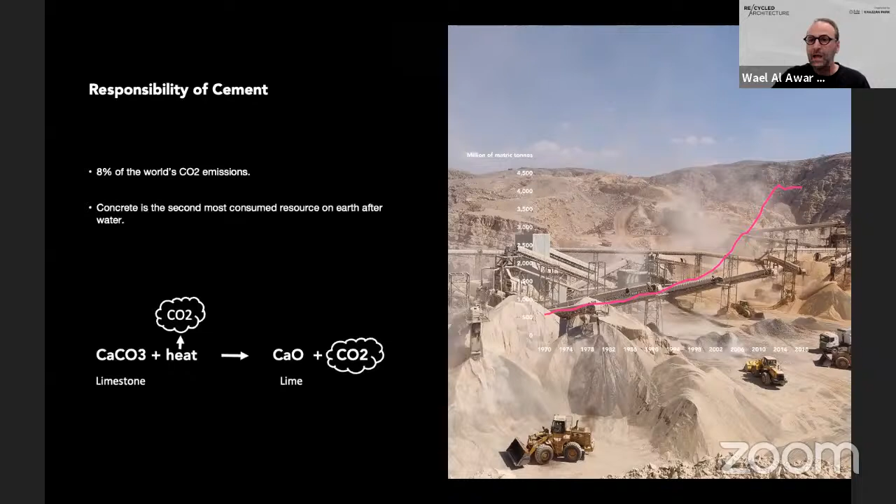So today, cement, why is it unsustainable? It is not because of the energy required to produce cement. It is actually a chemical reaction. You have to transform limestone to lime. And in this transformation, there is loss of CO2. And the incredible thing about this loss of CO2 is that it's a 1-to-1 ratio, meaning that 1 ton of cement produces 1 ton of CO2.

So the ratio is 1-to-1, which means that even 1 ton of cement, which probably can construct you a single column, not much, would need a tree for 40 years to consume that amount of CO2 that's gone into the environment. So if cement was invented today, no one would approve it. It would be a disaster. It would be something that no one could accept to use.

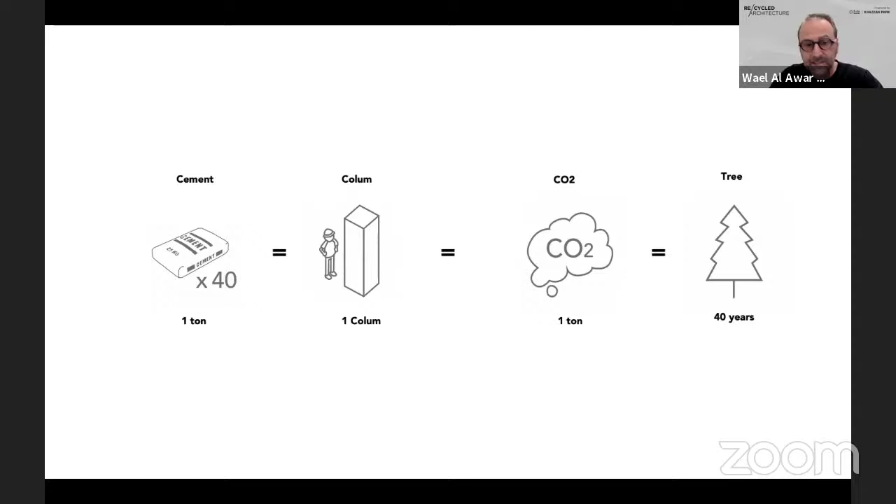But unfortunately, it's a material that's been around for so many years that the industry has become so powerful that we are unable to change it, even though we know of all the catastrophes it is causing in our environment. This is currently under construction in China, the biggest cement structure. So it's not only for architecture.

Cement is used a lot in infrastructure also, as well as things like tile paving and concrete paving in the streets. So cement is not associated only with buildings, but also with so many other structures. And actually, only 1/3 of cement is used in architecture or physical buildings. 2/3 are used in infrastructure and other things like wave breakers that go into the sea and the ocean.

Jumping on, so we talked about pollution. The second thing is extraction. Our construction industry is responsible for 40% of material depletion, resource depletion. So we consume from our planet. We're eating up our land as we go, 40% today. If we wait till 2050, what would that projection be? It's unimaginable at that scale.

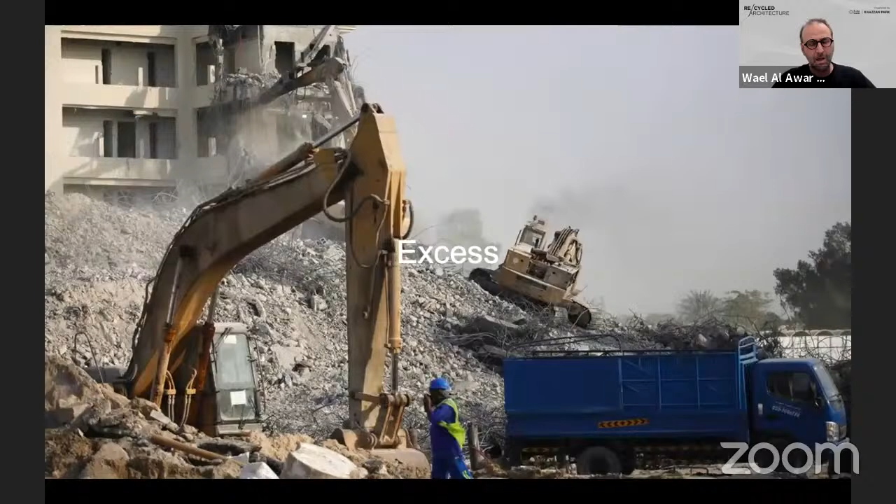And energy: today the construction industry consumes 40% of the global energy, 86% of which is non-renewable energy from fossil fuels. We are not even using solar, wind, or any other power. Mostly, 86% is from fossil fuels. And then finally, waste: we are also responsible for 40% of waste.

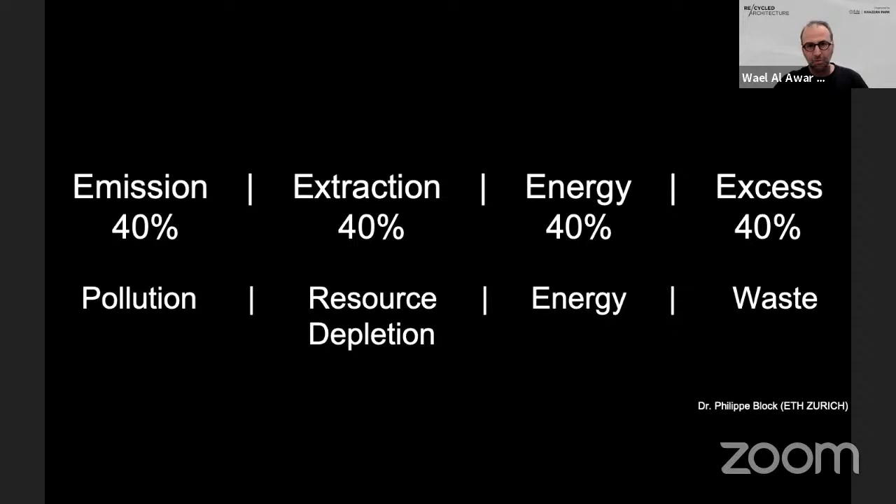These projections have been studied by Dr. Philippe Block at ETH Zurich, and I saw that in one of his last lectures. And these are things that we have to be very aware of, and we have to ask ourselves, what is our responsibility? What is my responsibility as a contemporary architect today in the 21st century, when I see this impact that's happening on the environment?

The vernacular architecture of the UAE was using the coral blocks that you find from nature, stacking them to create an architecture, where architecture was very contextual. This is something that is very inherent in our design philosophy, in my design philosophy too, that context is key, culture is key. Those have to be reflected in architecture also.

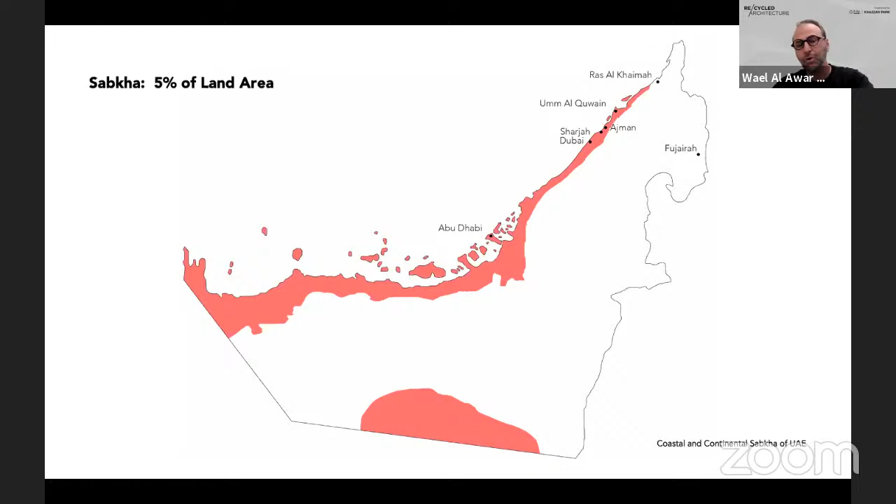It's very important to note that the UAE sabkha in 2018 was listed on the UNESCO tentative World Heritage sites. It is of that importance. It's a natural phenomenon that should be preserved and well understood. And we should understand that sabkhas also sequester CO2. 1 square meter of sabkha sequesters more CO2 than 1 square meter of rainforest.

So these are environments that can help us actually consume and get rid of CO2 in the environment. So they are called carbon sinks or natural sinks. What are other carbon sinks and natural sinks in our environment? The sea. The Arabian Sea is a natural sink or a carbon sink.

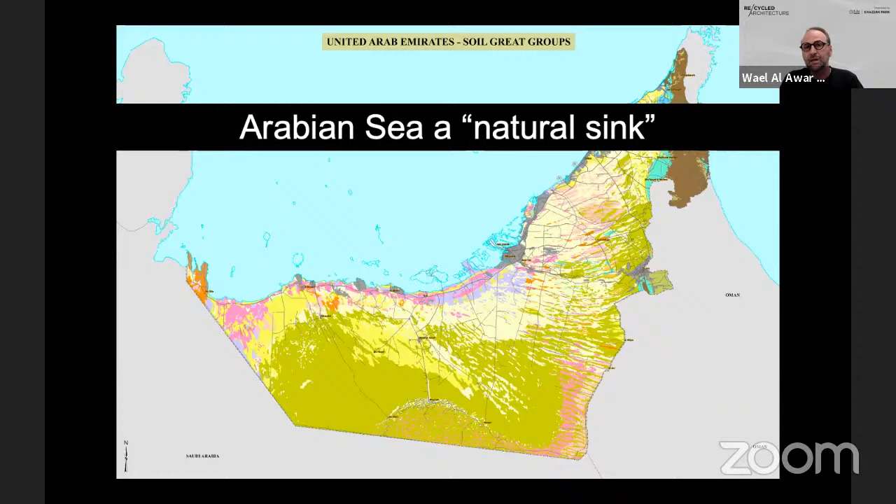But what's happening to that is important also to understand, that unfortunately, the GCC in general, not only the UAE, has scarce water resources. There is no water, so we need to desalinate. There's nothing wrong with desalination. I don't think there is anything wrong with that.

But what I think is wrong is that when you end up with a waste product of desalination, which is a highly salt concentrated brine, what you do with it is you throw it back into the sea. This is being dumped back into the Arabian Gulf. And you have all these countries, UAE, KSA, Kuwait, desalinating extensively. UAE is the third largest desalinator. First is KSA, second USA, third UAE.

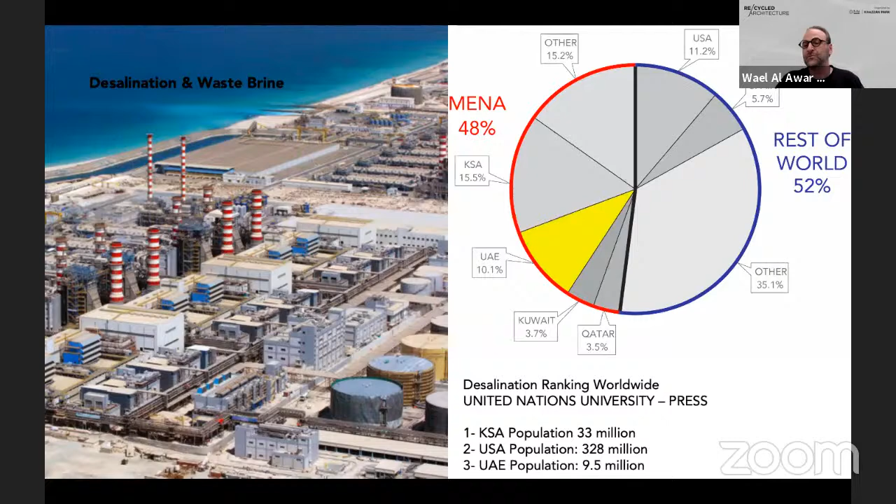And that residual brine is being dumped into the sea. We are threatening the sea. Every day there's the equivalent of 4,800 Olympic swimming pools being dumped back into the sea. So what does that mean? The MENA region is responsible for 48% of desalination, 52% for the whole rest of the world. And yet our population doesn't reach 100 million.

So for us, the important thing is that we saw that this desalination waste is probably an industrial waste that we can look at as a material in order to sustainably create an equivalent or a contender to cement, to Portland cement.

Marina Tabassum came up with fantastic terminology for what we are doing, and she called it the future vernacular, where in the past, the vernacular was your geography, your stone, your bamboo, your mud. Today, vernacular could be your waste. So this is where, again, it ties into sustainability, it ties into recycling. So we are studying how we recycle this residual brine that's being dumped back into the sea. And that's the whole theme, the whole research for the UAE National Pavilion in the Venice Biennale.

So we began with extensive experimentation, which starts off with simply placing fabrics into highly salt concentrated solutions, which start to crystallize, and then a fabric that works in tension starts to work in compression, and hence automatically creates an architecture.

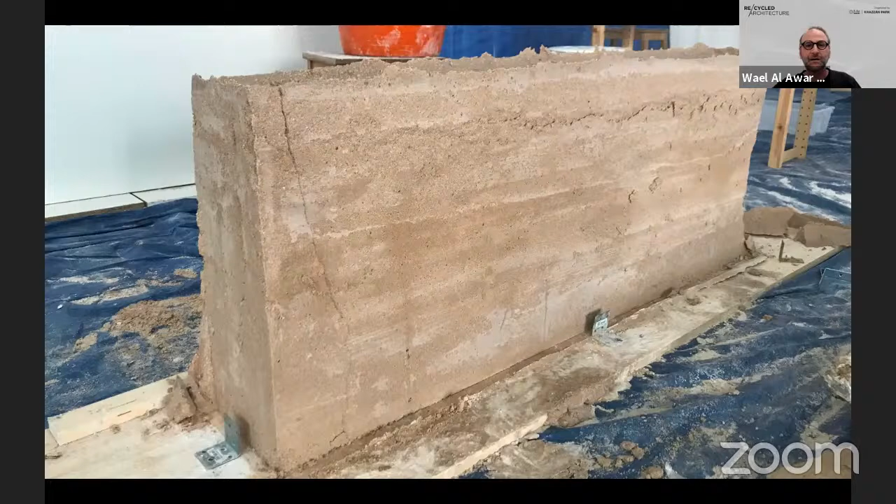These are more images of the different experiments with the different materials and minerals that we have extracted from the desalination brine, and also that are found in the natural geography of the UAE. We were even able to build a wall from this material. And our main collaborators that I have to mention are NYU Abu Dhabi, the AMRL, the Advanced Materials Research Laboratories, the American University of Sharjah, as well as the University of Tokyo. We have two laboratories in the University of Tokyo, under structural and advanced building technologies, working with us on designing the prototype that will be exhibited in Venice.

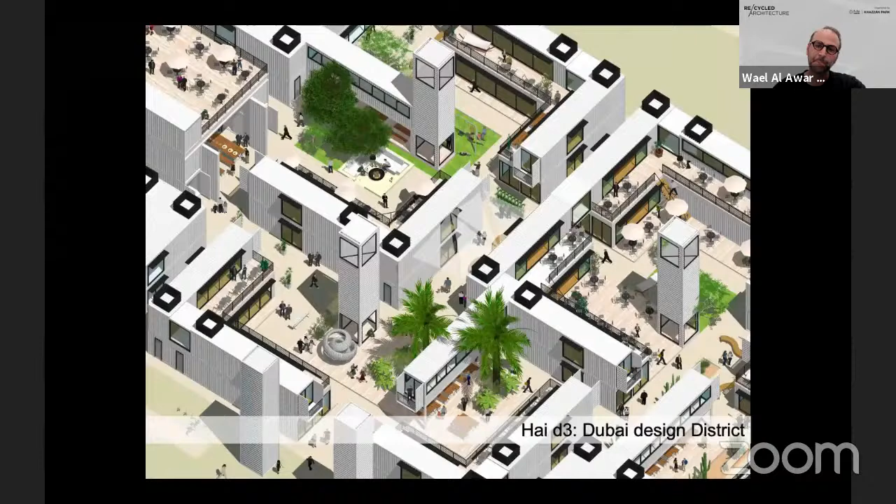Okay. Actually, it's very, very informative and very interesting, Wael. You mentioned all these materials. Now, when one thinks about recycling, of course, the first topic that comes to mind is material. But if we keep materials to one side, can you see a way where architecture itself can be recycled?

Yes. I'll probably explain here about Hai d3. I think that's an excellent project. This is a collaboration actually with Ahmed and Rashid, also cultural engineering. And this project is actually made from 84 shipping containers, 40-foot high cube shipping containers.

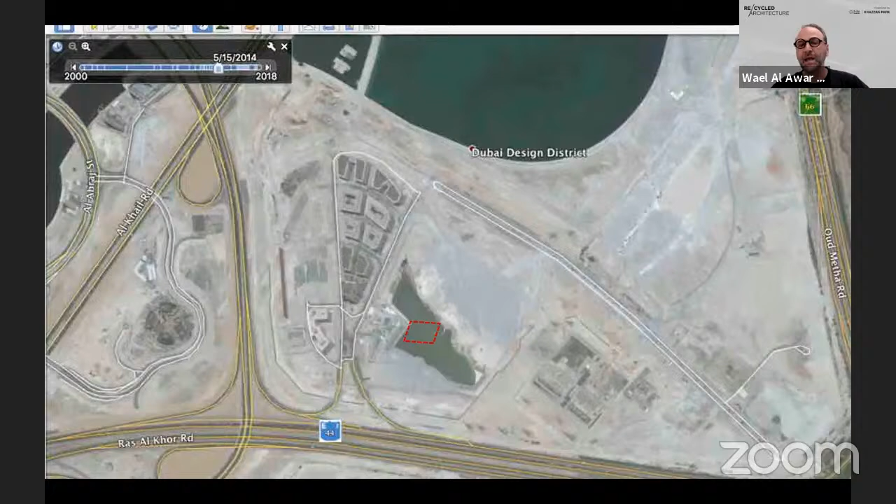And the site was next to Dubai Design District. Everyone's familiar, I believe, with the site, and it's quite a barren site. At that time, it was quite an open area, not any asphalted roads, etc. So we needed to create something that's quite strong and sustainable against that environment. So we looked at Dubai and what material we can use that is existent in Dubai, given that the client wanted this project to be temporary, not a permanent building structure.

So shipping container, again, was a perfect answer. It's a very sustainable solution. These structures are there. We're recycling them. We took 84 already used containers. I know each container has a tag and has a story. Each one had traveled to many countries in the world probably, and then these come and become assembled to create a space or an architecture.

So that's a local material. That could be a future vernacular. This is something that you have in your city. It is something that you should look at as readily available for you to use in order to produce your architecture. Again, as I said in the beginning, we're very interested in context and culture. So we wanted to create an architecture that is reflective of that and the context.

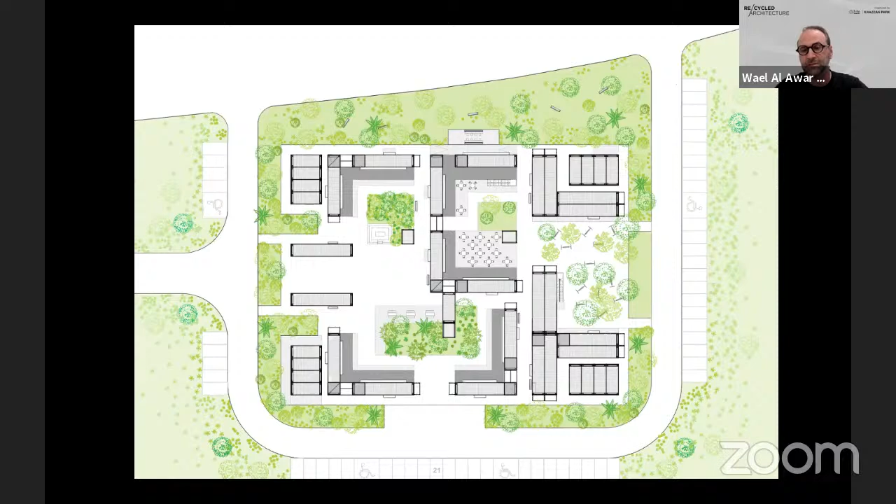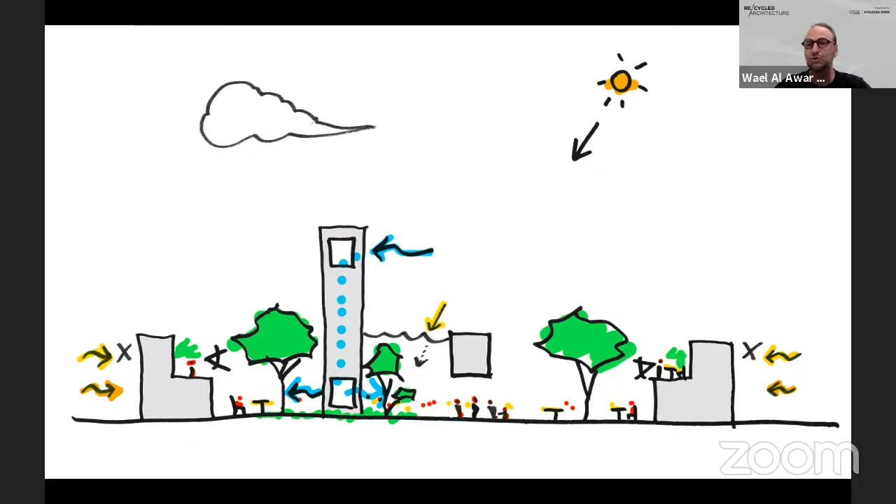And then, as you mentioned, we are interested in diagram of relations, not diagram of form, which means it's about the activity. How do you create architecture that is about natural wind ventilation, natural light, a comfortable space for you to sit in, something that you enjoy? And that is also an answer to what sustainability is at the end of the day. And then, stacking these containers to create that kind of environment.

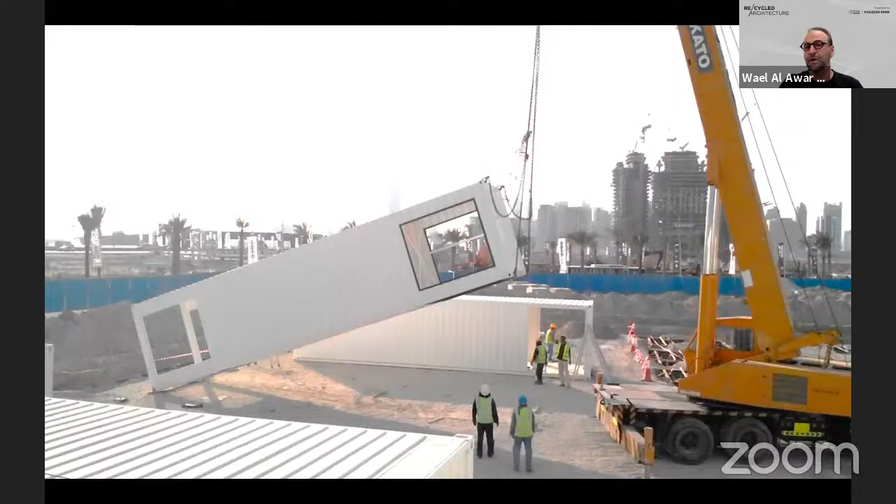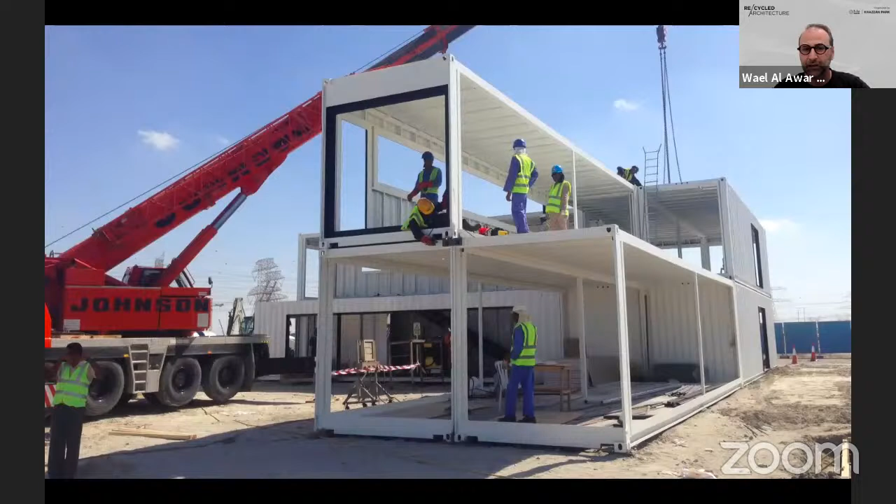Here you can see one of the containers, we actually have more than one, that we used as wind towers to naturally ventilate the gardens. We also didn't use any additional reinforcement or structures other than the containers themselves. So it's not a fake container project, where you have a steel or concrete structure and then you clad it with the wall of the container and say this is a container project. No, that is not at all sustainable or recycling in any sense.

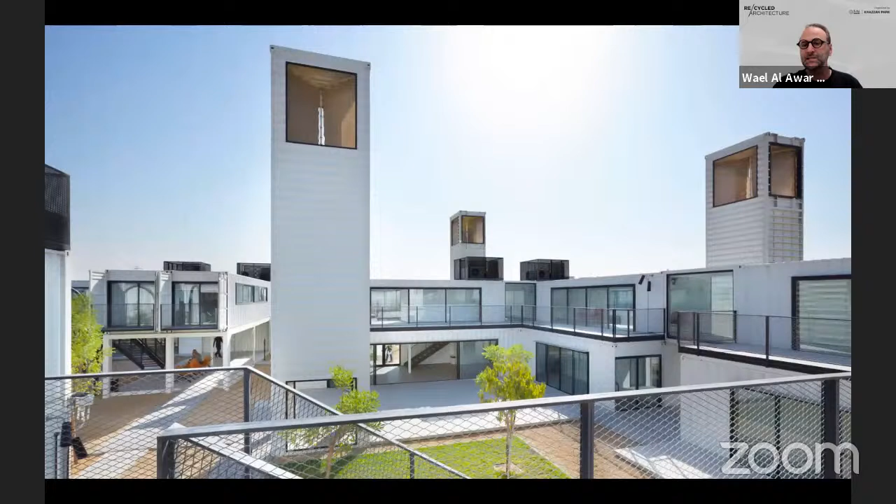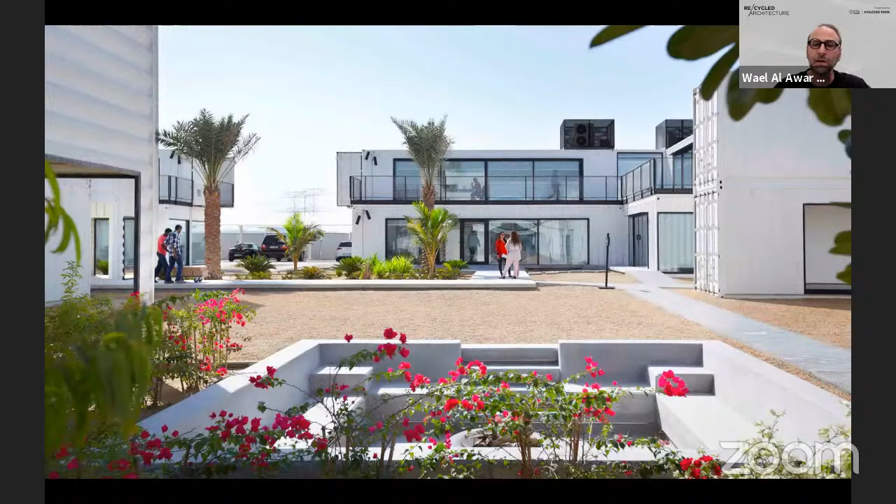So these can actually be dismantled and reassembled on any other site in less than a month, because they are built off-site. And here you can see photos. This was as soon as it was built. Here again, you can see we also created outdoor fire pit areas, and this balance between landscape and architecture, the seamlessness between inside and outside, the continuous connection is very important to us, so that one can really enjoy the space as a whole.

And these are more recent photos I took. I added them because the landscape had really picked up in the project. When the project finishes and you take photos, the landscape is still picking up. It needs a couple of years until it really nurtures, and then you can really feel the power of the space. It just becomes much more vibrant.

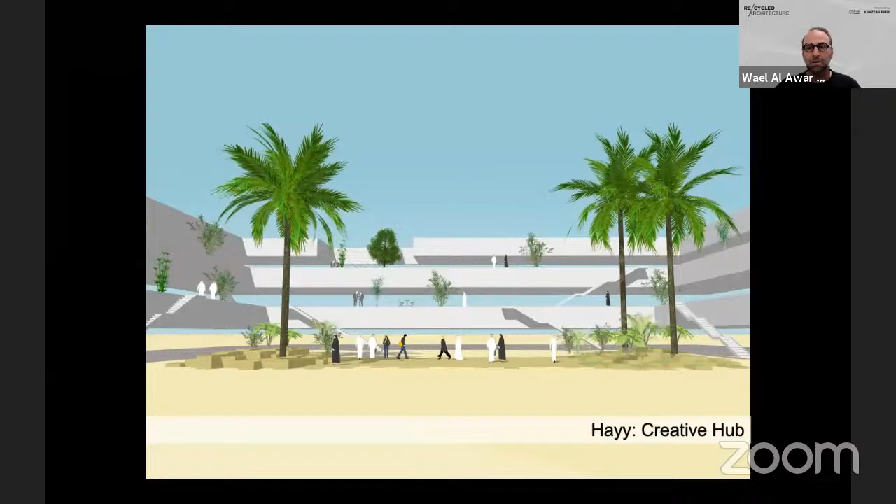Okay, this is my answer, George, to that question. I mean, okay. Great. So a beautiful project, by the way.

So a lot of material used in the building industry, interior fit-outs and urban installations, are all of organic natural substance. To state a few: wood, glass, brick. I know you have issues with concrete, so I will not mention that. So what are the materials that you use in your architecture, and how do these materials affect and define your design process and product? Yes, sure, of course.

Well, actually, I'll present Hayy Creative Hub in Jeddah for this question. I think it really also puts a perspective on how we see architecture and materiality in that essence. And just before I go into the project, the important thing about material is that after you throw it back into a dump site, or the building is dead, this material should naturally decompose into the earth. Or you should be able to easily dissect it and recycle it. These two things are very important. Either or. If you cannot do this or that, then I think it is problematic.

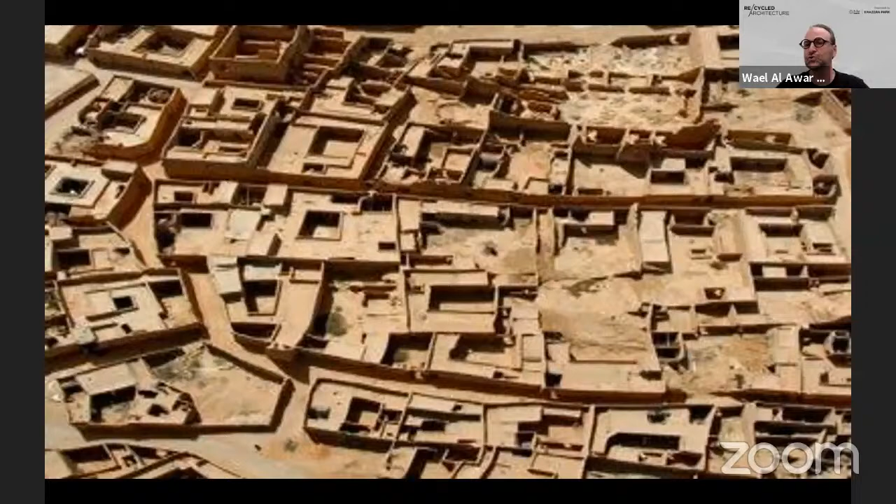This is something every architect should keep in mind, I believe, when selecting materials for the project. So I'll move into Hayy Creative Hub, which is almost complete. I'll show you some pictures, hopefully opening mid next year in Saudi Arabia for Art Jameel and Community Jameel. The project again is in Jeddah. So we looked at the local culture, the local context, the local urban morphology. Actually, Jeddah is very similar to Dubai in terms of climate, probably slightly more moderate. The Red Sea is maybe a bit cooler than the Gulf, because of the increased salinity in the Gulf, which traps heat and becomes like this giant battery that we live next to.

And you can see a beautiful picture of 100 years ago. This is a market in Jeddah, and you can see how people gather outside around retail stores, buying and discussing and socializing and drinking coffee maybe. This desire of the people to talk to one another, to hang out and gather in groups. The site actually is also quite a tabula rasa. Like most of the sites we work with here, it's in a no-context situation. But this no context is a context, so it has a very special sense to it. So again, it was important to introvert. You could not really connect to the outside; it is really barren in the area. It's a cultural facility, and there's a residential neighborhood right next to us, so we need to respect that neighborhood, and introverting just made a lot of sense to us.

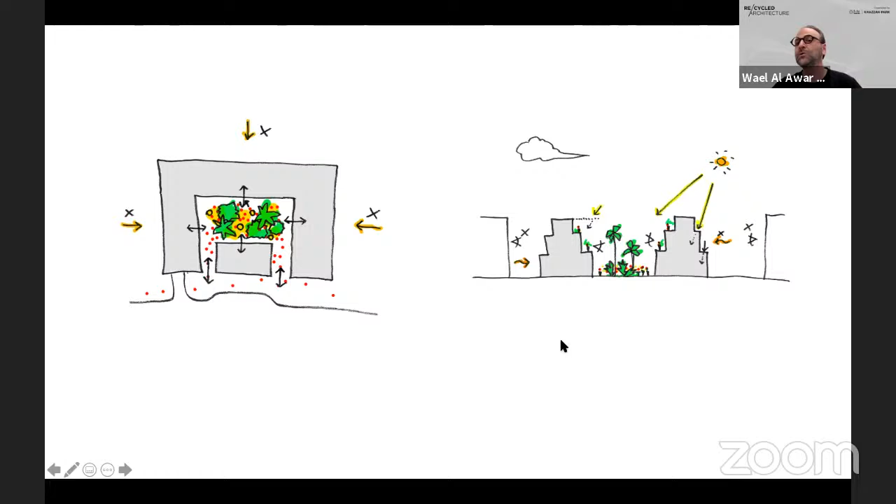Through 100 studies, this is not a one-off, we were convinced at the end that the best design solution for this project is one single courtyard that brings all these people together, all this creative hub, all this community. You are forced every morning to come into this one big space and say good morning before you go into your own private office or space. That courtyard continues on the terraces on the first and second floor, a continuation of the courtyard space. From the outside it also sets back to break the scale against the residential neighborhood. One giant wall that is introverting is just too aggressive. Setting back also allowed us to bring natural light into all the spaces without opening windows to the outside, as you can see soon in the pictures.

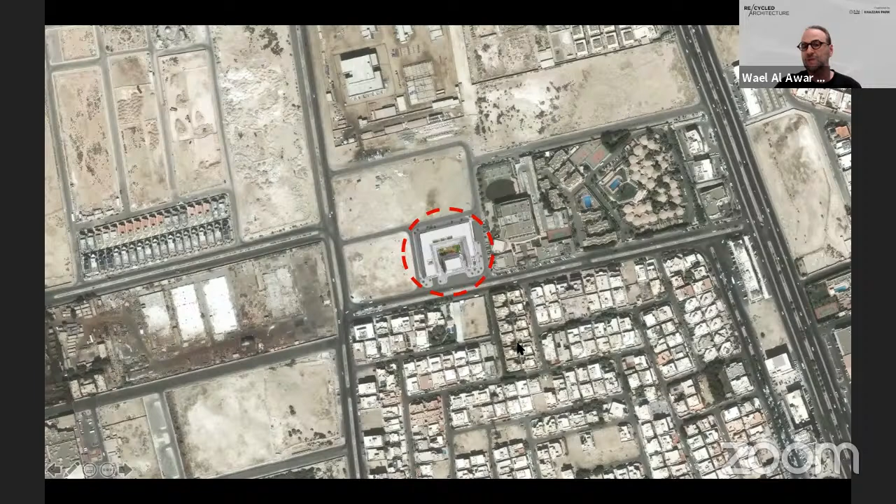So this is the building. It sits on an island site with four roads around it, and a residential neighborhood below. The sites around it are zoned residential, so they'll eventually be built into villas and houses. And here you can see the building is a U structure that sets back from the outside and the inside, with an independent structure in the middle that is a gallery, an exhibition space run by Art Jameel throughout the year, while the others are multi-use spaces.

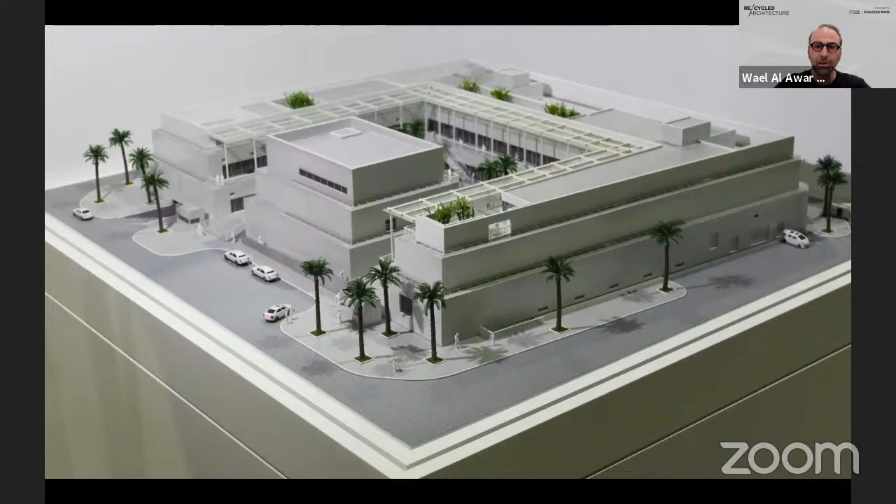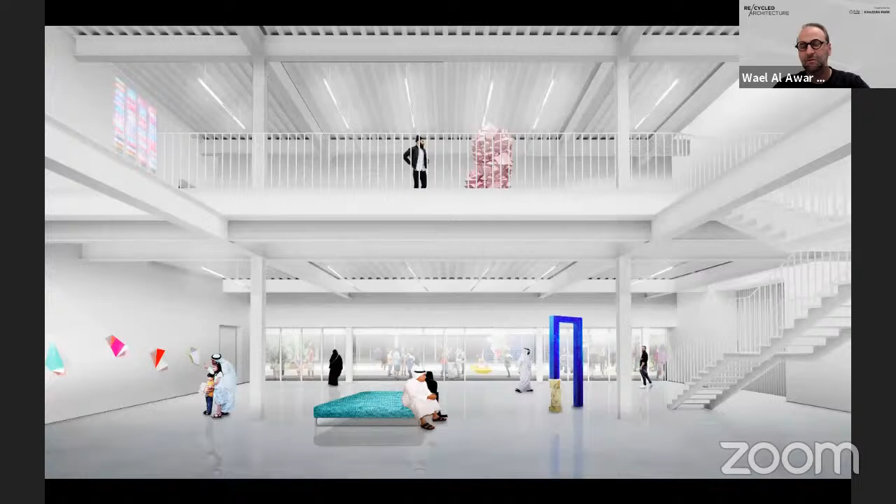So we really kind of try to create a natural environment and allow for natural wind flows and natural light to occupy the spaces rather than artificial light and artificial MEP and all of that. This is from a different angle looking at the courtyard, and then these are renderings of the gallery spaces, but I'll show you the build. So this is the build. So this is what you see.

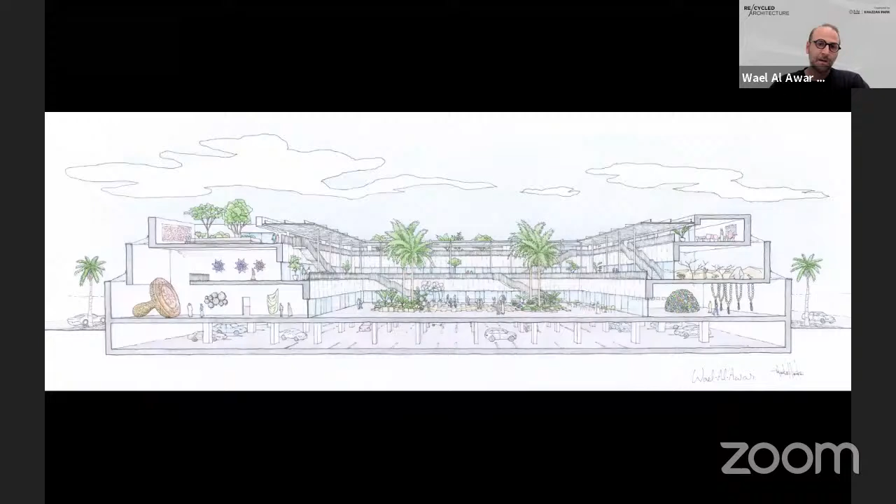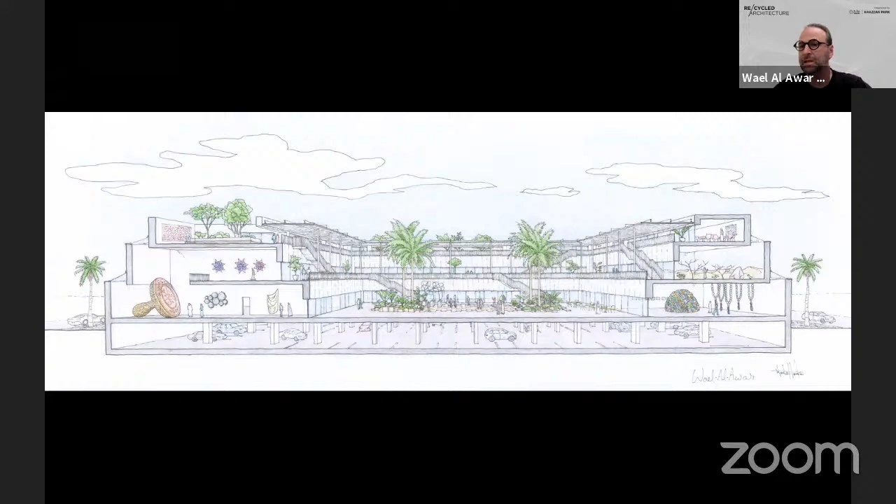And that's a section sketch. Actually, as I was telling you the other day, this was part of the Design Miami shop online, where there was an awareness or fundraising campaign called Architects for Beirut, where the money goes to the AUB laboratory for the study of redeveloping Beirut after the blast. And this was a sketch that we donated, and it's sold already. It was sold online.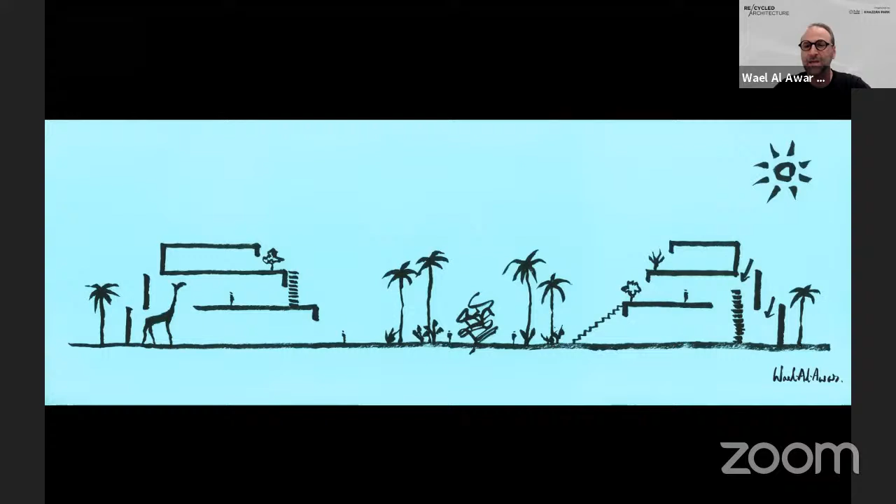And here you can see the diagram of relations we talk about. It's not about form. It's really about the relations and how things come together rather than the actual form of the building itself.

I really liked this bold gesture of closing from outside and opening to the inside, creating this introverted courtyard. Even from outside, when you look at the project, all is closed, but then inside all is open. And that's beautiful. I think that's a very good, very strong, bold gesture. Thank you. From your side, guys.

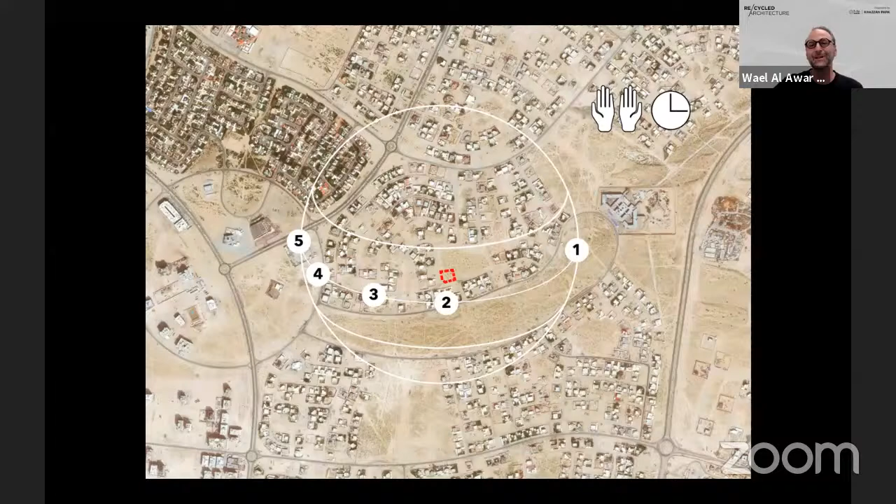And I think there's also Al-Warqa Mosque, which can answer this question in a different way. Al-Warqa Mosque in Dubai was nominated for the Aga Khan Award in the last cycle. And here, again, the site was a tabula rasa in the middle of the desert. When I first visited the site with the client, there were no roads, nothing. It was just all sand, and there was housing coming up around it. But today it's actually all built. There's a lot of roads there, a lot of villas around it.

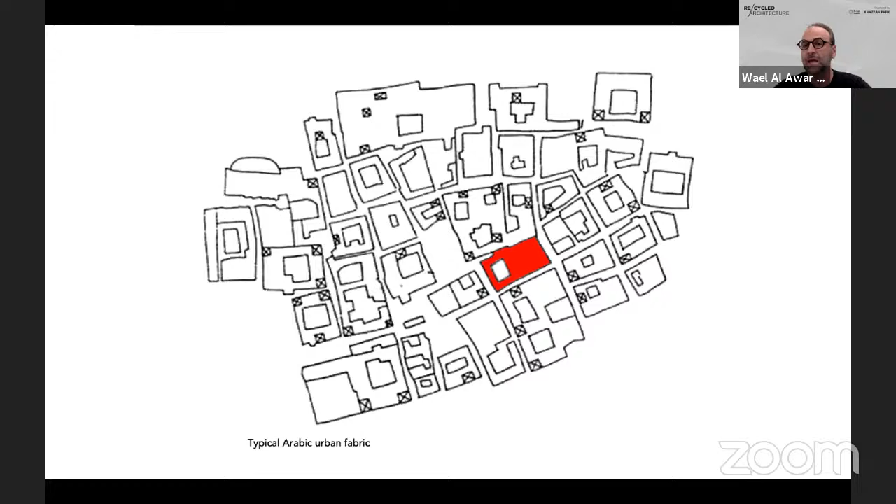But again, we looked at the neighborhood. We wanted to create a mosque that really ties in with the urban fabric and is a community space, a mosque that is communal rather than iconic, a place where people go to pray and hang out, where they can read a book, they can sit and chat with friends. And this was very important for us, where the mosque is part of the community.

And that is going back into the Arab hypostyle mosque, actually, in history. So if you look at the history, there's 4 typologies of mosques. This is being very zoomed out. It's not that simple, but as architects, we like to zoom out and zoom in. But looking at the extreme zoom out, there's the Arab hypostyle, the central Turkish dome, the Persian and the Indian, and each create different results.

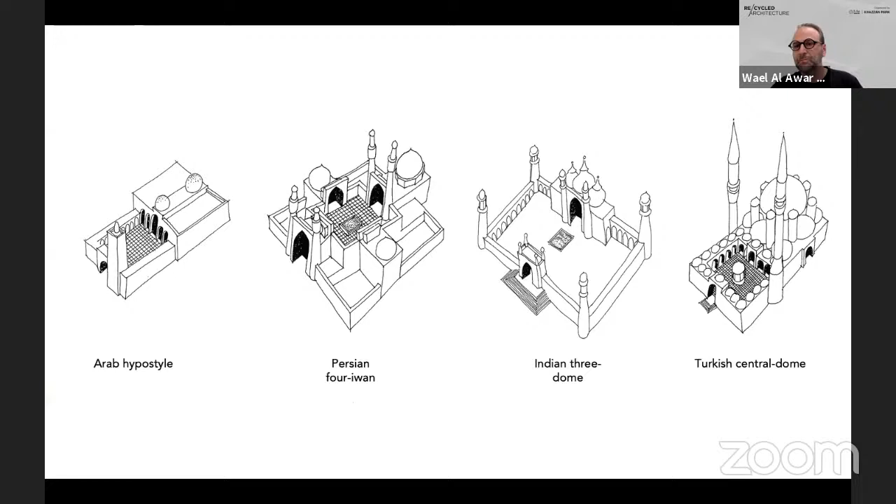While the Turkish is really central, it's very authoritarian, iconic. It's not a community space. It's not built as a communal gesture. So we wanted that Arab hypostyle, and that simplicity, we thought, is very sustainable and very important also to the environment. So the mosque, all the external stone is yellow Saudi stone. It's a local stone brought in from Saudi Arabia. It's a sandstone that was bush hammered and installed.

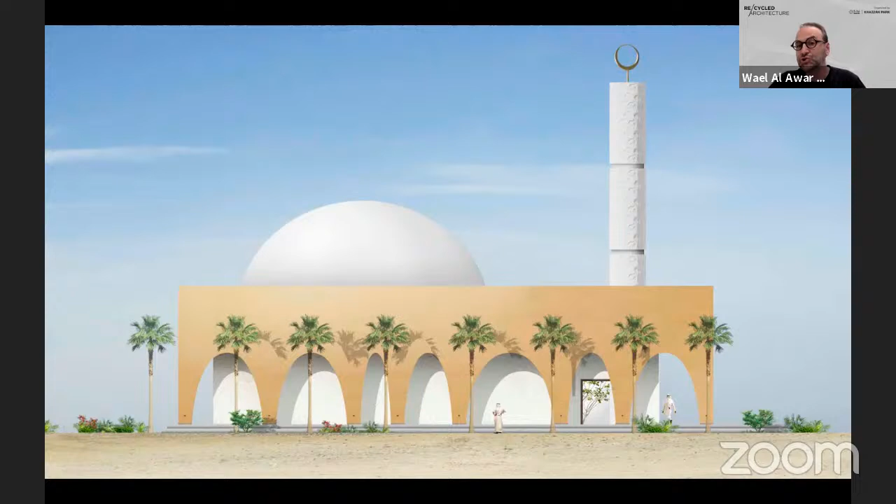I won't go into planning, but here you can see the Riwaq wraps around, so there's no boundary wall. It's open to the public. Anyone can walk in anytime from any side of the street. And we proposed to use parabolic arches of different sizes. We have 4 different sizes.

Again, the arch didn't need to be a circular arch or a horseshoe arch, because the arch was structure in the past. Today, it's not structure. So if it was going to be something that's just decorative, then why not it being playful, inviting? It becomes like music on the facade where it invites people in, with interplays. It opens, it closes, it gives you that interplay.

Fluidity, yes. And then here you can see a man walking in from the Riwaq into a sahan with his son, going to pray, and then the haram inside. So you can see all these overlaps, these subtleties from the Riwaq to the sahan to the haram space.

And then we wrap the whole Riwaq with a GRC that's also of a pattern, an abstracted floral motif that also changes with the movement of the sun. So you have different shadows. This interplay or dialogue with the sun is important for us. It's phenomenal. That's what we are really interested in.

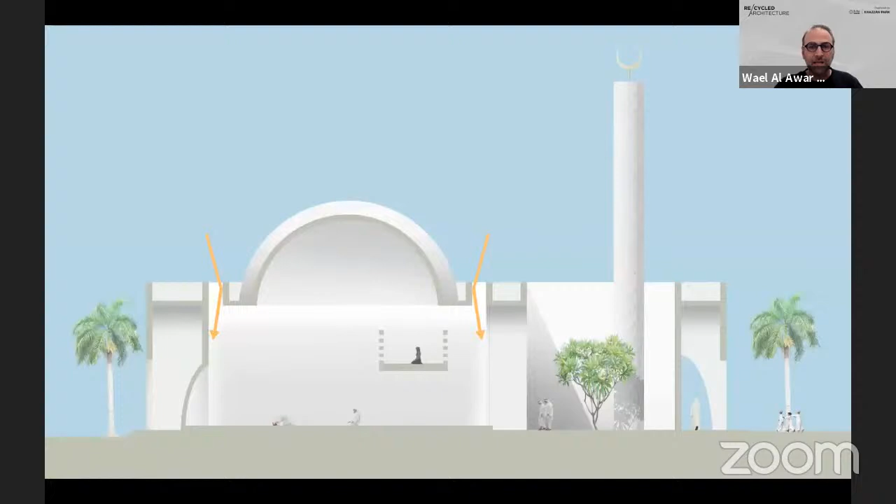That's how this space actually works, and that's the future vernacular. That's your asset in Dubai. It's the sun. I mean, this won't work, I will talk about it probably in the second. This won't work in Singapore, where the sun is not there for 80% of the day, it won't work in London, you have clouds all day. It's raining. So you have to think of the environment there, the context there, and how you can create architecture that's in line with the context, in line with its environment.

Yes, I think I've answered that. Okay. So before we go to the questions, because we have a lot of questions from the audience, I want to ask you the last question. State one environmental opportunity and or challenge that you had to face while designing or constructing a project.

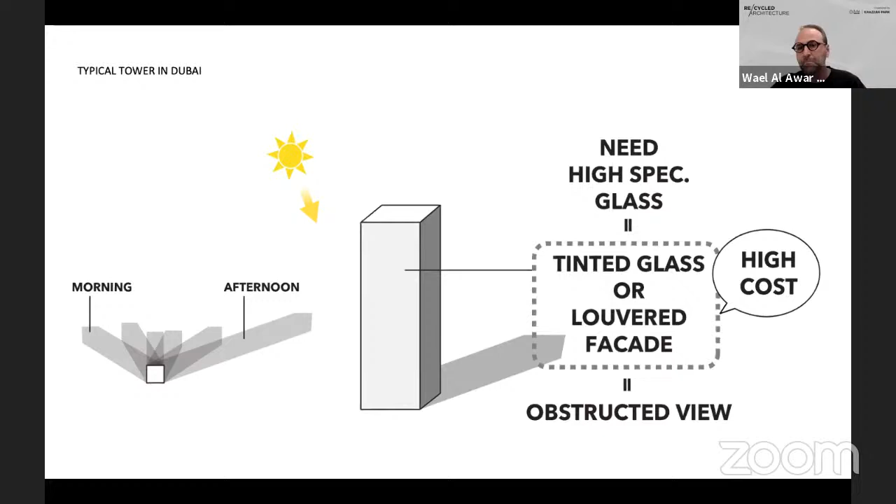It's 88 degrees. So a typical tower is actually just an extruded box, right? So your east, west, south are all the same, being exposed to the same heat gain. So then you need to rely on triple glazing, very expensive glass and heavy MEP equipment. While if we just simply tilted the tower towards the south and hid the south facade because of the very high sun angle in Dubai, then you will just expose more of the north facade, and most of the building and the facades will be in shade. Automatically, they will start to shade themselves with that tilt.

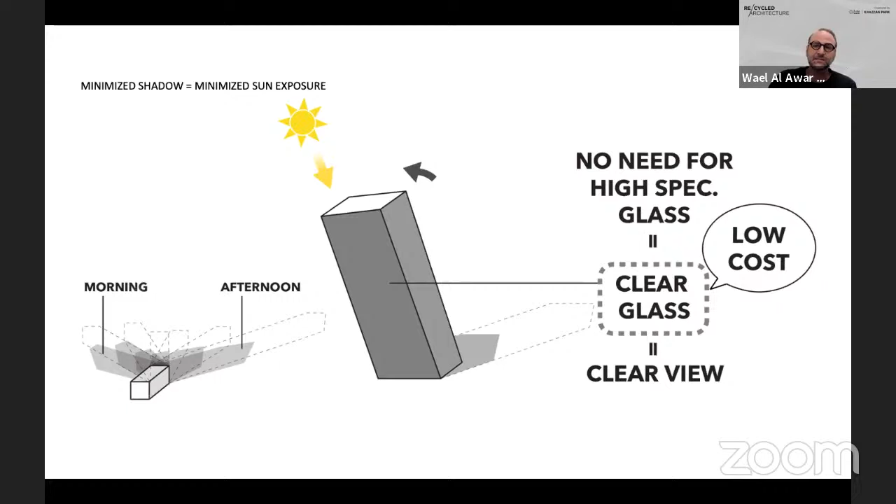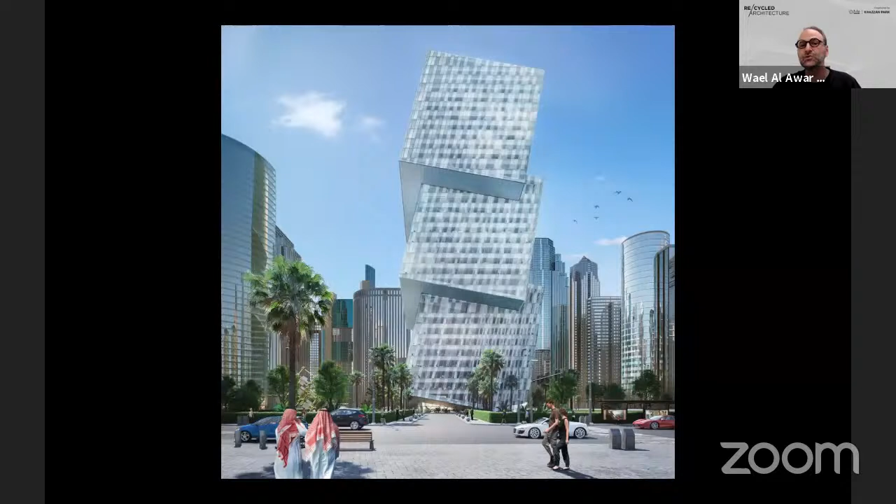The problem with that tilt is that when you create it, you cannot put in your vertical shaft. So what we did is just chop it into 3 different volumes and stack them, which added more shade to the facades, and then we could easily introduce the vertical shaft. Then you end up with this form.

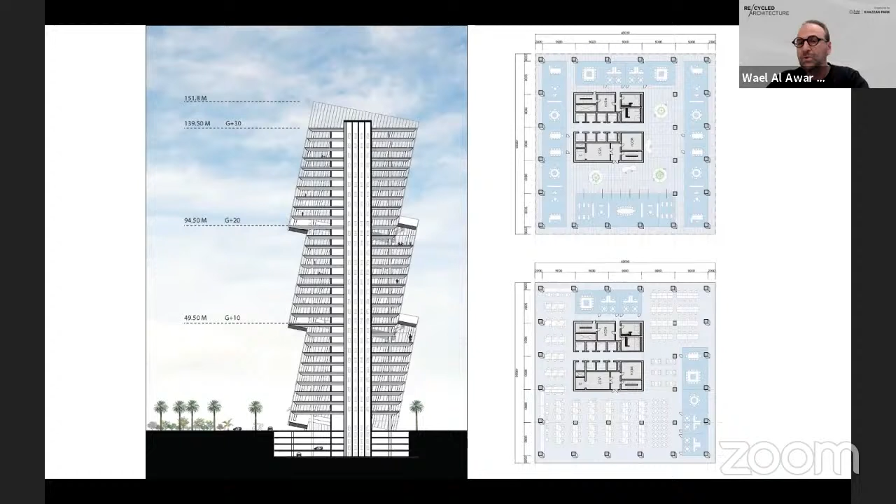And this form is not a diagram of form, it's a diagram of relations. This is not a form of us wanting to create a gesture because it looks good. No, this is really a sustainable process of thinking of the environment, the sun, that yielded this form. The form is a result of a study in that sense. And it's a very typical, simple section. If you look at the section, it's a very simple section. We did all the facade studies and studied them in detail.

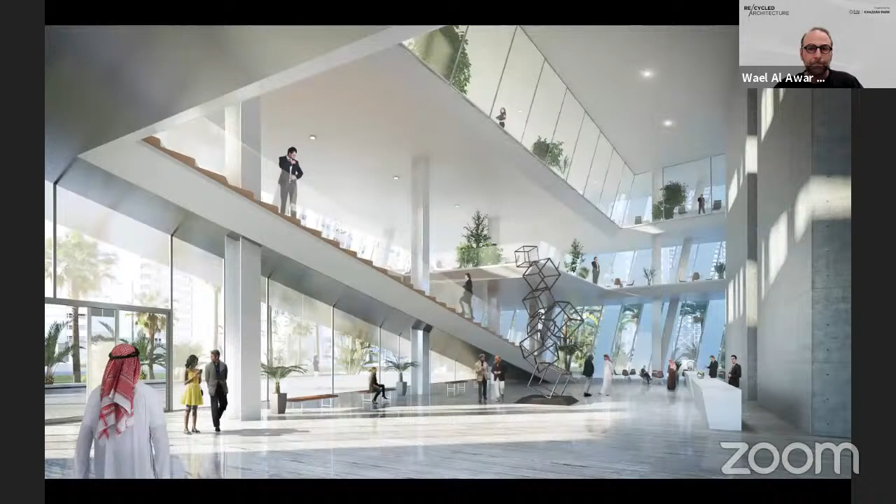This project was part of the World Architecture Festival, competing for the top 6 offices in the world, actually. Unfortunately, we lost to a very cute office in Vietnam, which was very green. And I thought it's unfair because we're in a tower category. We shouldn't be in an office category where someone can just submit a single story office design.

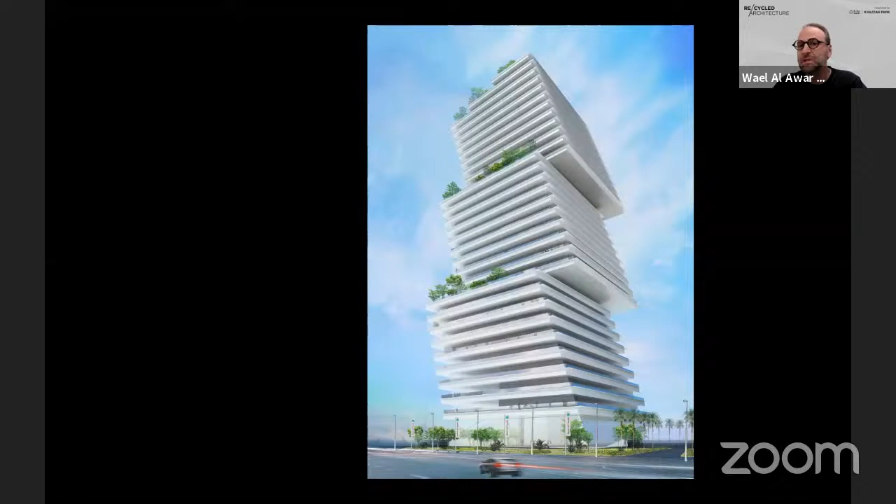Well, you know, and then you can create variations to that. If it's not an office building, it could be a residential building. You can just extend the slabs, which could create even more shade for all your facades. Basically, yes, this is it.